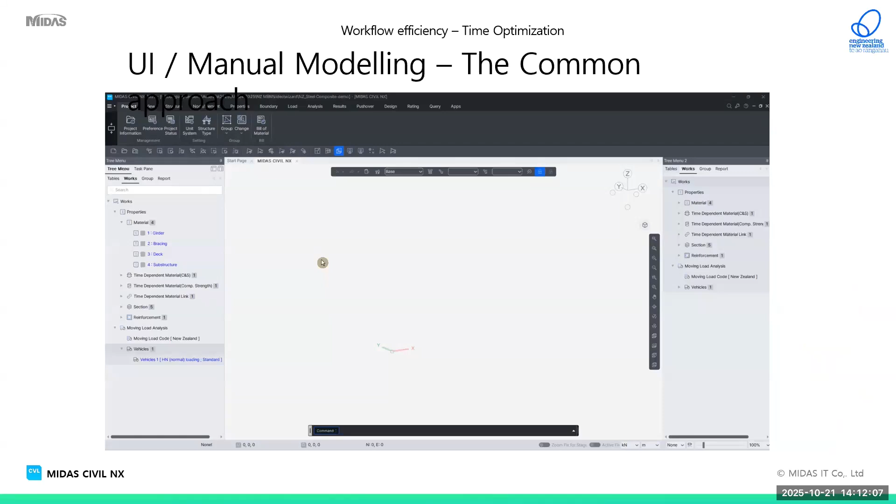Okay, so the very first one: UI modeling.

This is a typical way of modeling from the time when software were first introduced. This is just a UI modeling procedure within MIDAS. This might have been very useful back then, but with evolving technology, even this procedure had to change due to a couple of reasons.

Firstly is reliance on multiple sources for preliminary data. William has mentioned material sections, which to choose or which to prefer.

Second is time-intensive manual inputs if you need to modify anything, change anything, or even result extraction. For every revision, we need to extract results for every other scenario, and it is a very time-consuming process. It is also, with UI modeling, prone to user oversight.

It is difficult to reproduce the same results, and there's limited flexibility with iterations. Mainly, time is a very big constraint when we are going with traditional UI modeling.

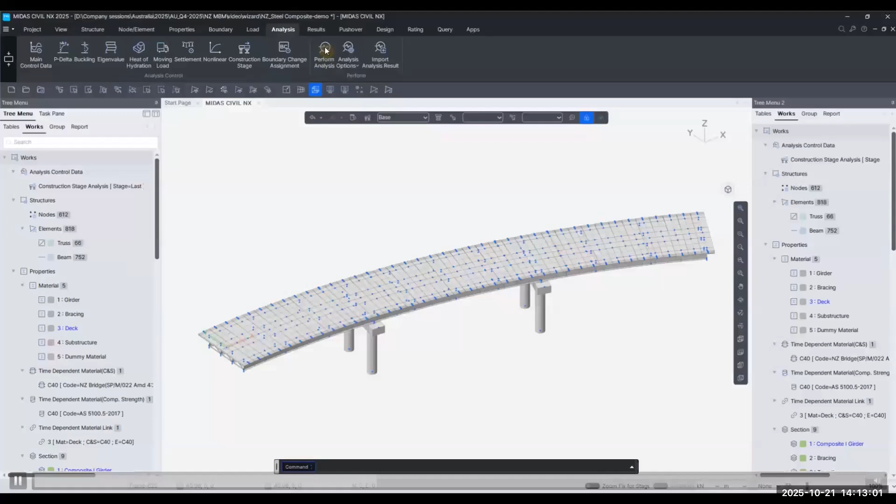So then what would be the way forward with this? We can think of Excel. Since every engineer is familiar with Excel the most, we can use Excel as a centralized platform and automate workflows through it, which will help us reduce the time which we are manually spending on the software part.

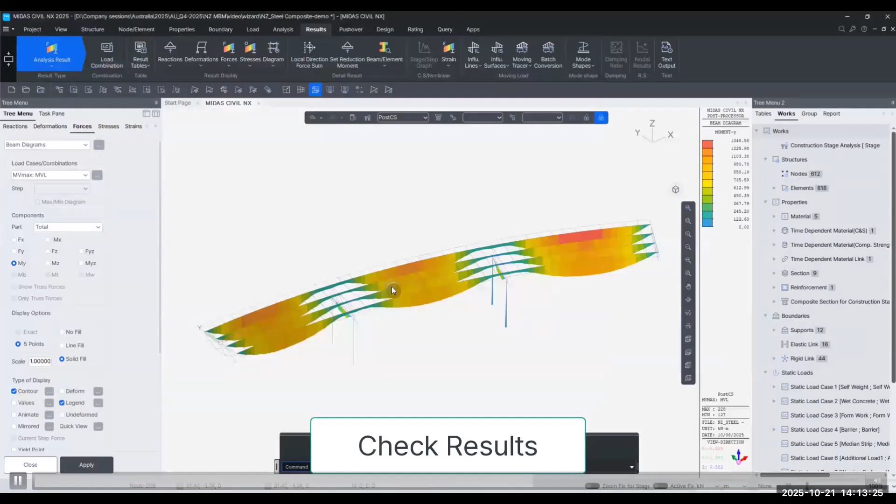This gave you an idea of how manual UI modeling can be conducted within MIDAS: definitions of material, defining the entire geometry, structures, and extracting the results. And if we intend to do the design within the software, we can conduct design as well.

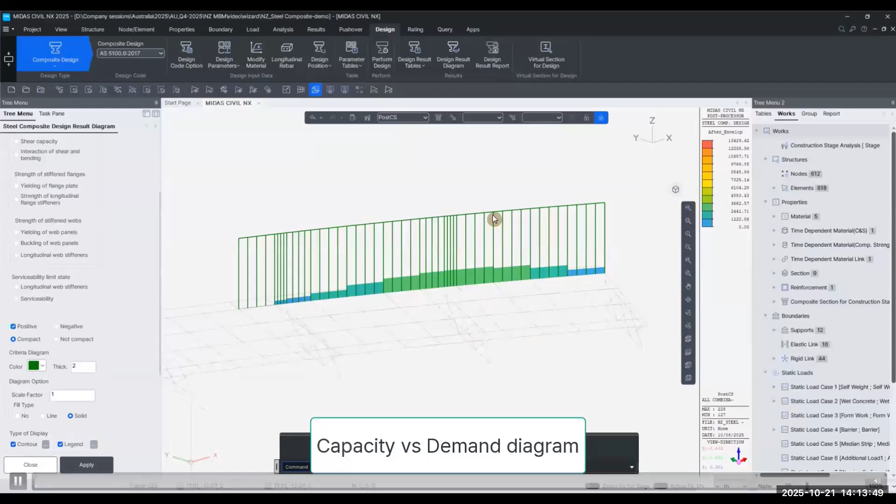This was an example of a steel composite bridge in curved span. Select elements for design, I'll just skim it through. Check the capacity of a few sections and obtain the detailed design report from the software, along with the design guide.

It is a completely automated spreadsheet wherein the entire geometry section, model, load, construction stages, everything is automated. Even result extraction is automated in the similar workflow.

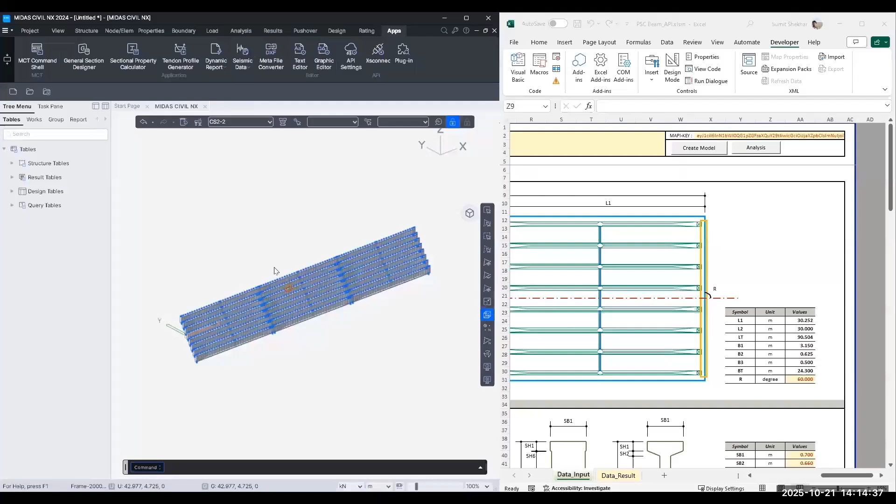With Excel, as long as the template is used for that intended purpose, maybe for the steel composite bridge with zero radius or no skew, it works like clockwork. We can use it n number of times. It is very efficient, very seamless.

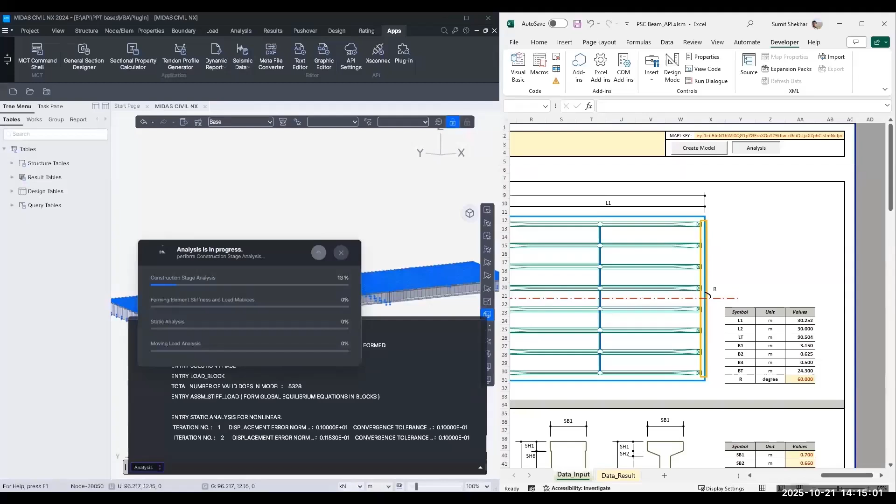But as soon as we try to make any changes to the existing workflow, most of our work is disrupted, because we need to change all the automation, check every step of how the material is created, how the geometry is changing, how the geometry is aligning with the loads which are input. So for fresh models, yes, this is a very good workflow, and engineers have been using it for a long time.

But now when there are revisions, again, if we need to add a skew or change the radius, I'm not saying it is not possible, but it is a bit difficult with Excel. Now engineers had to look for another option. So what would that option be?

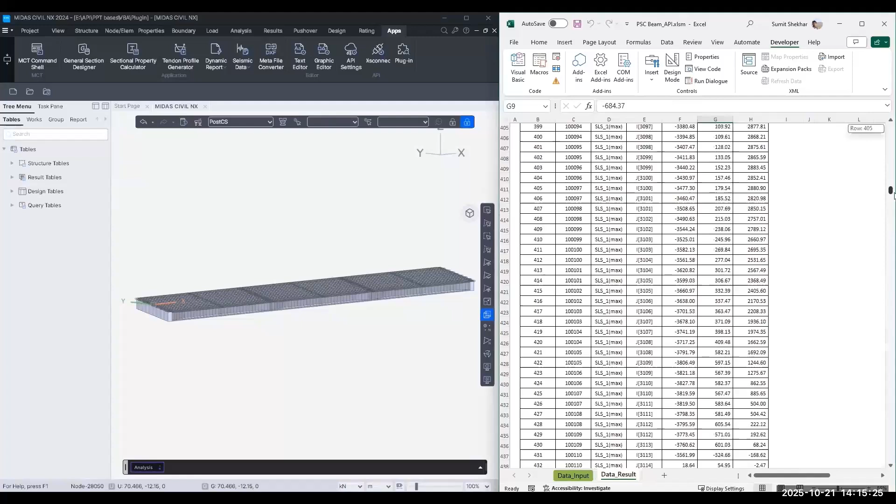It will be graphic and parametric tools such as Blender or Grasshopper. For this video, the entire bridge was modeled and the results were extracted in Excel itself, along with the images for report generation and documentation. Again, this works very well for a typical bridge, specific bridges.

Okay, now we have established that for fresh models, either you go with UI modeling or with Excel workflows, it will work very well. But what if we need to add parameters, as I said, change the skew, change the alignment? Then the parametric tools such as Grasshopper come into place. This is a simple example of how it can be parameterized.

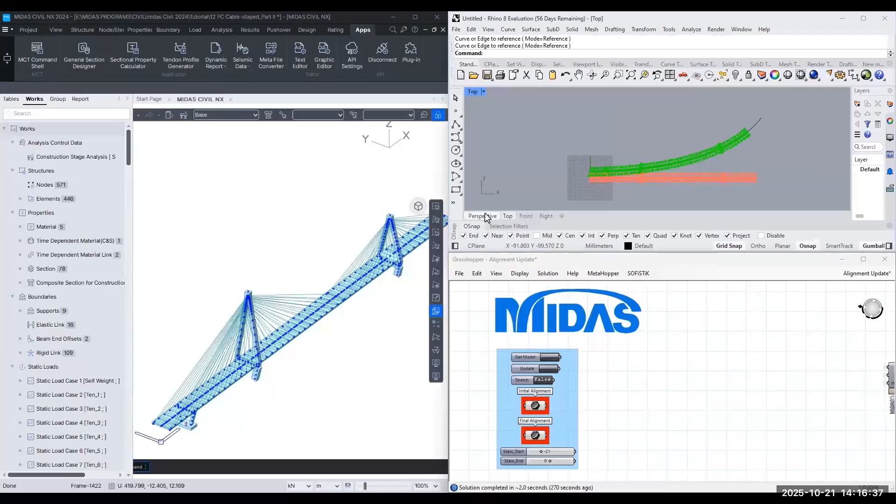So here we have already created the model with Excel or with UI modeling. Now we will add a parameter to change the alignment. Obviously it is very good if you parameterize the entire structure from Grasshopper itself, but we can also use Grasshopper to add parameters to a few necessary elements. So over here it's an example of changing the alignment. We imported the nodes in Rhino, defined an initial curve and a final curve so that the offset reference to move all the loads and the boundary conditions are present, and then we can update the geometry.

So I believe this is much more quicker and efficient with Grasshopper. Again, I'm not saying this is a better version, but I believe the engineer has to choose which tools he has to use for specific tasks.

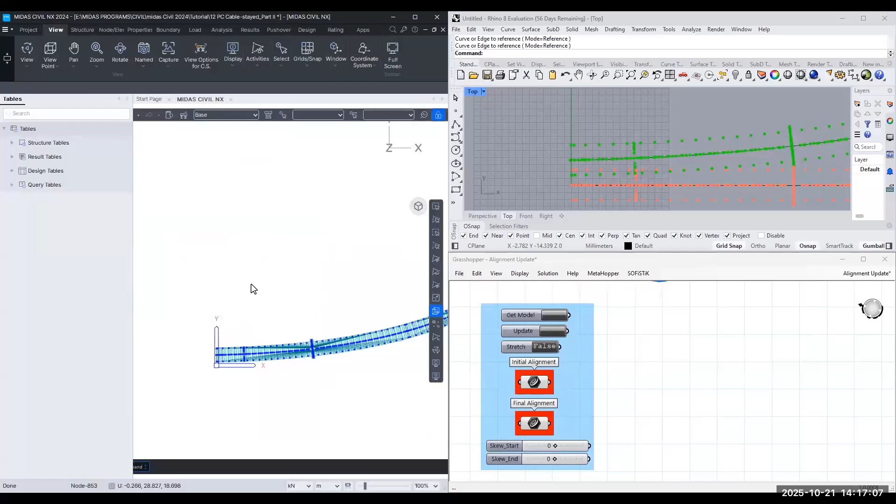Okay, now limitations with such tools. These tools are easy, but this does require an urge to go beyond just the structural engineering domain. And also with commercial tools such as Grasshopper, there is a cost associated with it, so again the accessibility is limited.

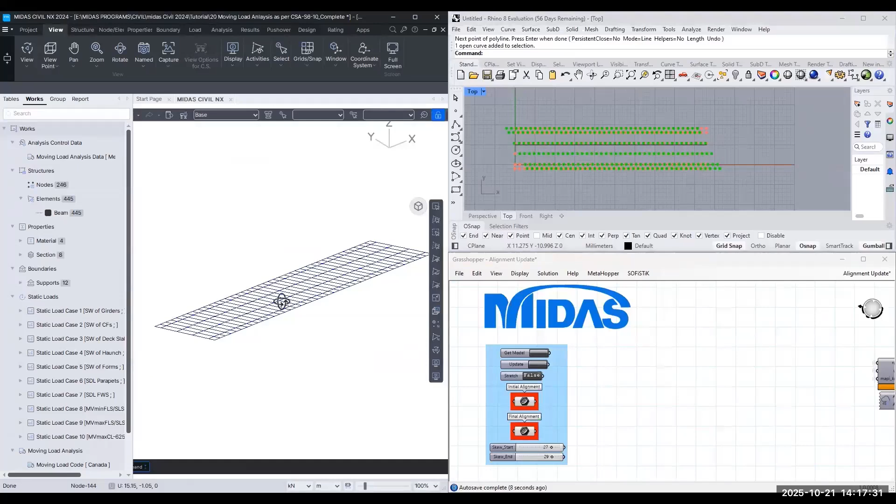Just on this, another example of aligning or modifying the skew for the specific structure. So we have seen just changing the alignment, and for the skew angle we have used Grasshopper. All the manual modeling was done by the core software.

So as I said, there is cost associated with it, therefore the accessibility for such tools is somewhat limited, I would say. What is the way forward with this? Then engineers tend to move to Python. We'll see why Python would be beneficial.

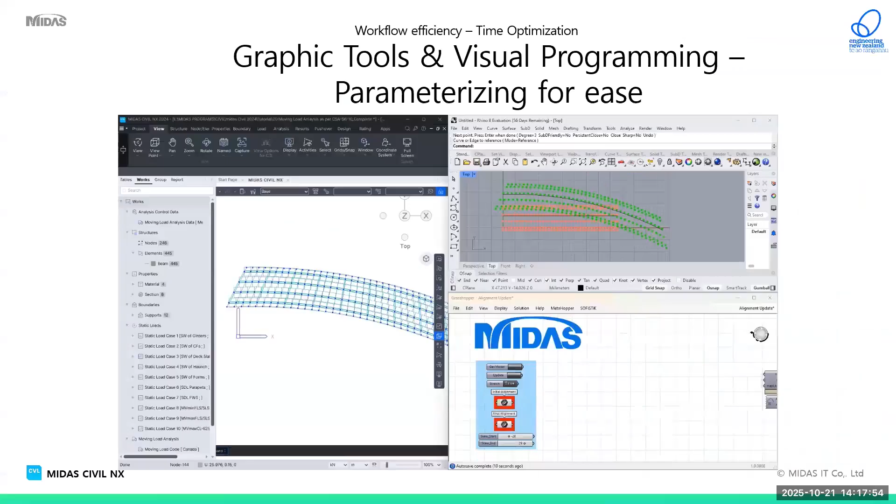Okay, so Python and why it is gaining traction. First is versatility, and its integration with modern tools and APIs. Also, I believe 90-95% of all the AI tools which are being developed are based on Python, so therefore Python is widely accepted, not only in structural engineering but even in other domains of engineering.

Let's talk about standard libraries in Python, which I believe will be the major asset for anyone using the libraries. Everyone must have heard about standard libraries of Python such as NumPy, Pandas, Matplotlib. These are typical libraries which are very famous. Similar to those, based on a similar concept to reduce the workflow, MIDAS has created its own Python library.

So it will reduce your entire script to easily readable syntax, I would say. This is just a list of all the components of the library. If an engineer requires, he can also take a look at all the backend coding of the library. It is free, or it is open source, I would say. And for engineers who just want to get the job done, they can directly use the library and make any specific changes.

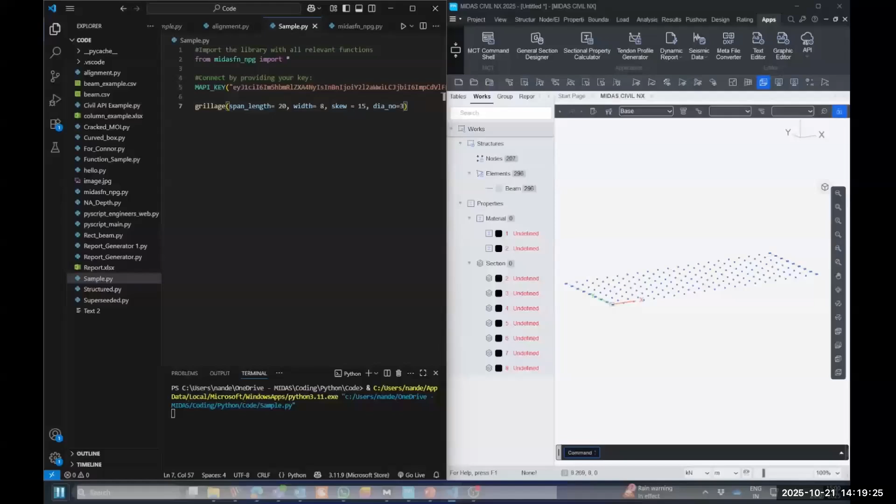So just on this part, we can see hardly 7 or 8 lines of code is written, and an entire bridge structure would be generated with this. So length is specified, width, skew, and number of diaphragms, and RCC T-girder is an example over here. So materials, sections, geometry, boundary conditions, loads, and even analysis is integrated with this single tool.

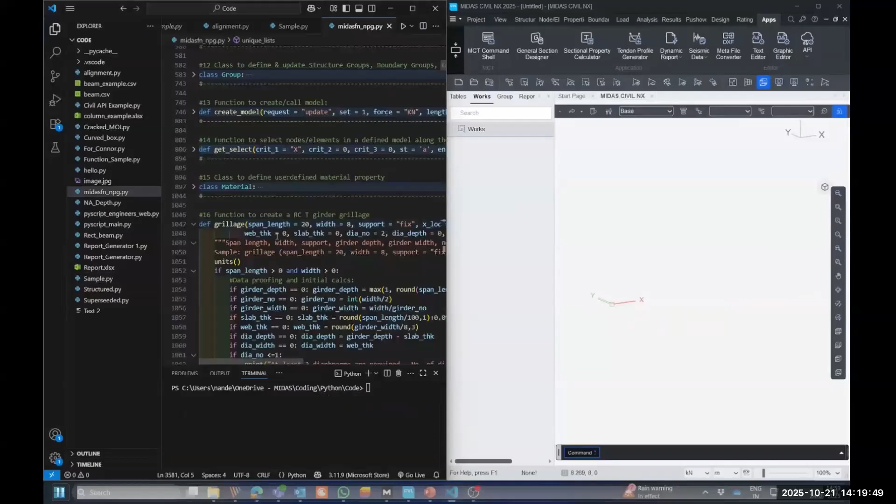So with just a single line, the engineer need not spend much time, just understand the code first and then generate the model quickly. And I also mentioned versatility.

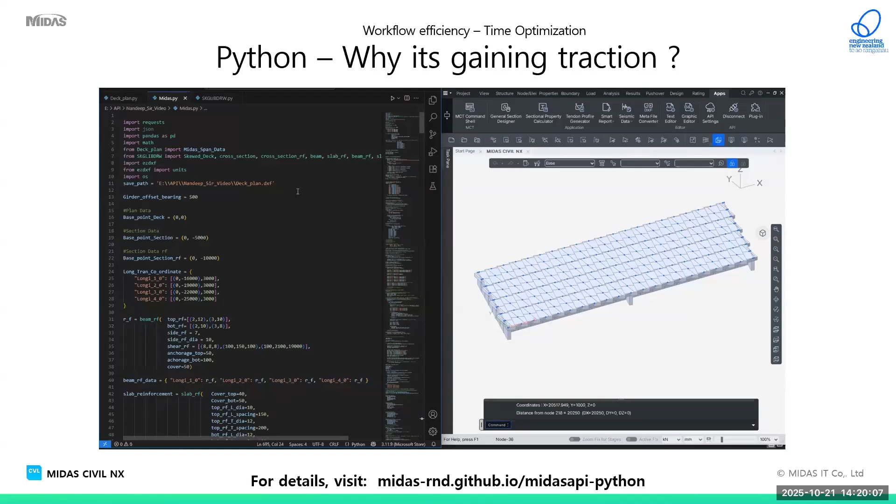So how can Python be used? It can be used to generate drawings. So instead of using any intermediate tool between the analysis software and the drawing part, we can directly generate drawings from the analysis tool itself, with the help of Python.

So for the same structure, the RCC T-girder structure which we generated in the previous video, we can create a DXF format. Again, this library is Python's own library. We have just used that library, integrated it with MIDAS API, and the drawings will be directly generated from the analysis tool such as MIDAS Civil NX.

So this, I believe, will help save a lot of time in the markup drawing stage, which every engineer draws and then sends to the draftsman, gets back, makes changes, and this goes to and fro. Instead, just a ready DXF file can be shared with the draftsman. All the plan view, element details, sectional details, everything can be extracted from an analysis tool.

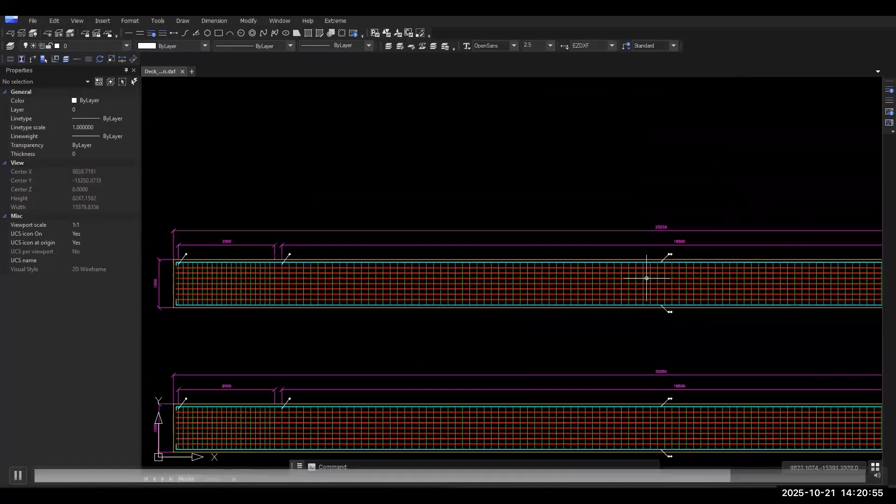Yeah, so we can see rebar annotations, reinforcement details. Yeah, complete thing.

I believe we have had clients who are using the AI or API until this point with Python. But then how should we prepare ourselves for the future? AI is something which is very big, and as William rightly said, I don't think anyone will be able to cope up with it.

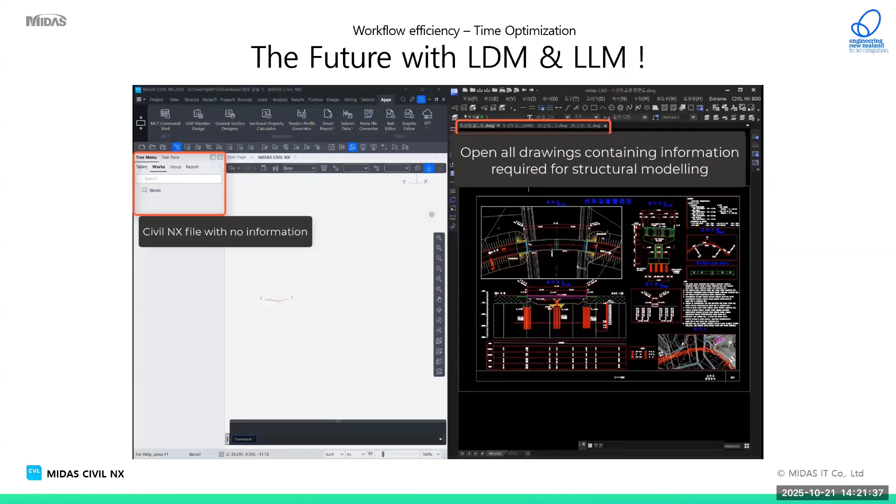But MIDAS is trying its best to implement AI in this drawing process, in its software products. So this is just an example of what we are working on. We are calling this LDM, meaning Large Drawing Model. Once this is ready, engineer can simply open the required drawings. Typical procedure is, if we have a past similar project, we open those drawings, take reference of those drawings.

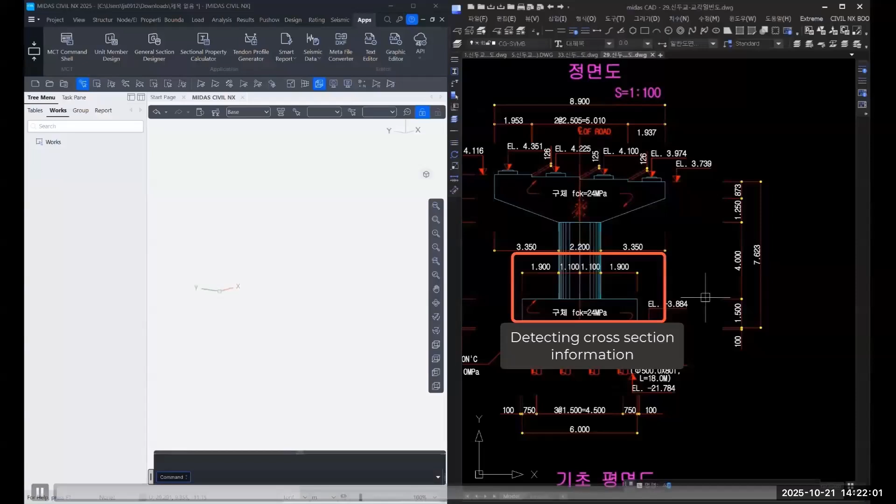Replicate it for a new project, modify, and then create drawings again for the existing project. So this tool will be able to identify all the sectional details, dimensions, material details, and it will be able to generate an entire analysis model within MIDAS Civil NX.

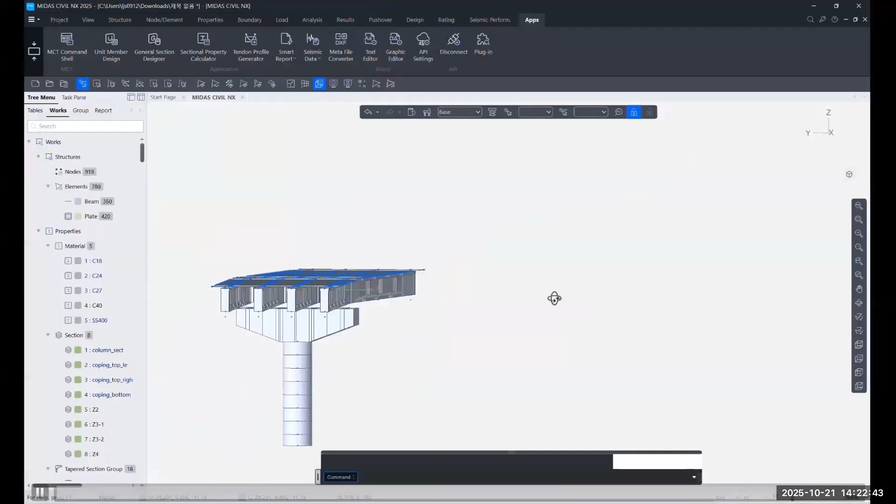So it will read all the components from the drawing format. All the information - general arrangement drawing, dimensions, material properties - will be extracted, and a complete model will be generated in Civil NX. Then you can do manual changes, add parameters, use Python, Grasshopper to modify as per the own project, and then automatically generate drawings again from the analysis tool. So engineer need not have multiple softwares. He can just use single model file for model generation, drawing generation, and all the things.

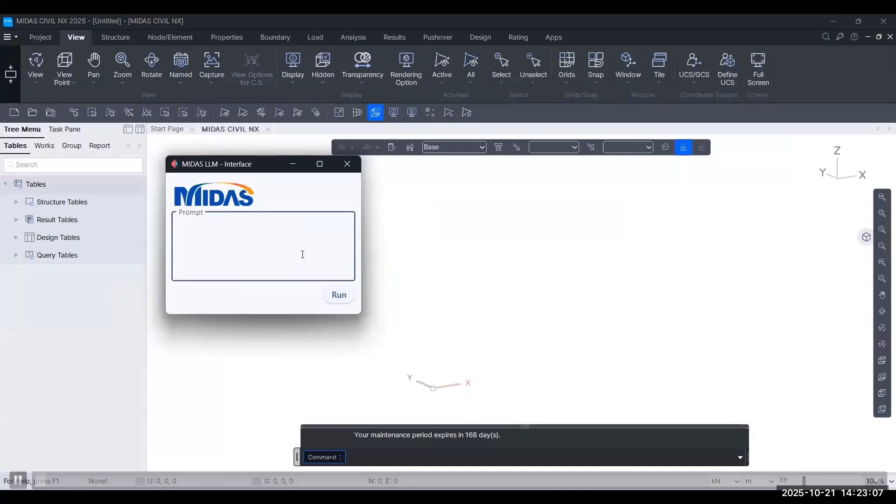And this is another aspect of how AI can be utilized. This is just something which we are trying with help of prompts. So let's see how this gives an idea. We can provide prompts. It is not developed yet, it is still in development. So yeah.

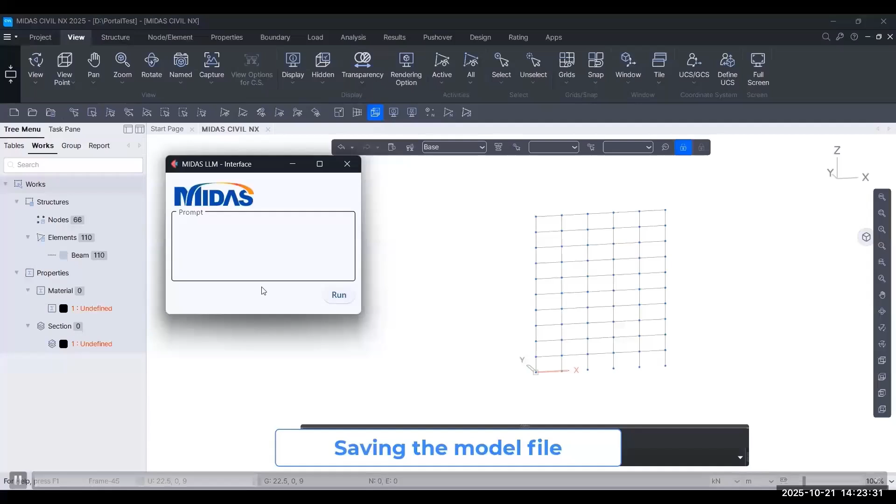So a prompt to create a frame structure - we just specify what bays, height, width should be provided. If you need to save, just write 'save the model', the folder location, and the model will be saved at the respective location. Just another example in this tool is to create a grillage.

Again, this was just the conceptual stage, so just limited training. But we can see how prompting can be one of the use cases, how AI can be implemented with the softwares. So create a grillage of so and so length, width, spacing, and a skew, and a grillage model would be generated.

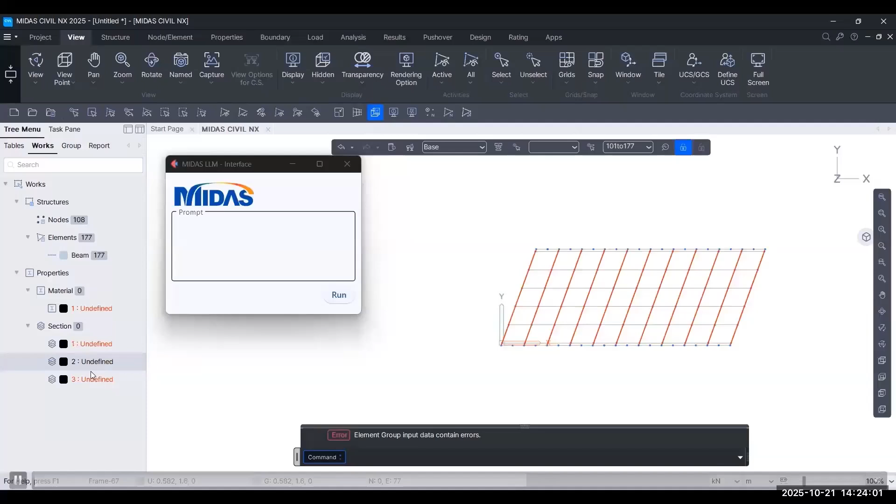And just to give you a bit more of an insight of how everything will work - I think it will be up ahead in the video.

So basically a Qwen 3 1.7B model was utilized as an AI to generate the scripts, and an LLM was used to train the AI on the MIDAS library. So this is how on the back end it will work.

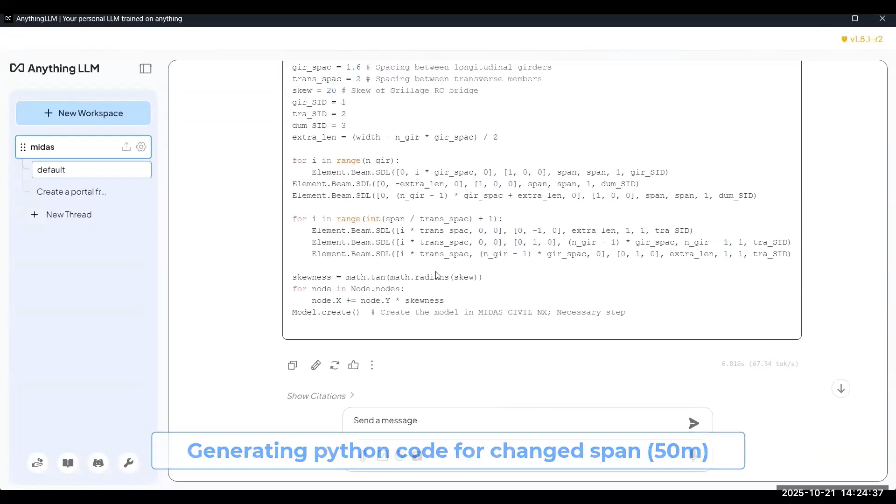So in the prompt, we're just switching the span lengths from 20 meters to 50 meters and click on generate. It will generate an entire Python code, and this Python code is backfed to the software with the help of API. So this is how the entire prompting function with AI and MIDAS CIVIL NX will work.

Improving efficiency is always, I believe, what everyone strives for. But as I mentioned, it should not be at the cost of compromising any codal compliances, accuracy, and local industry practice. So now let's take a look at how MIDAS helps us align all of these things together in the second part of the presentation.

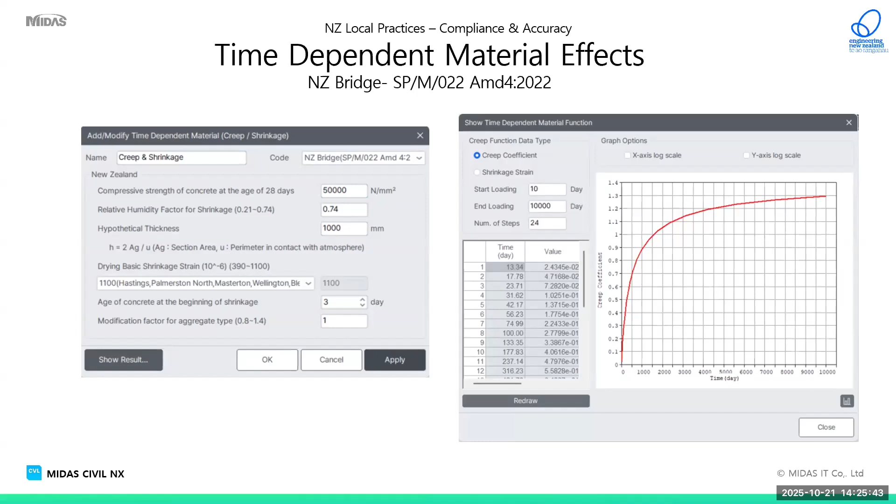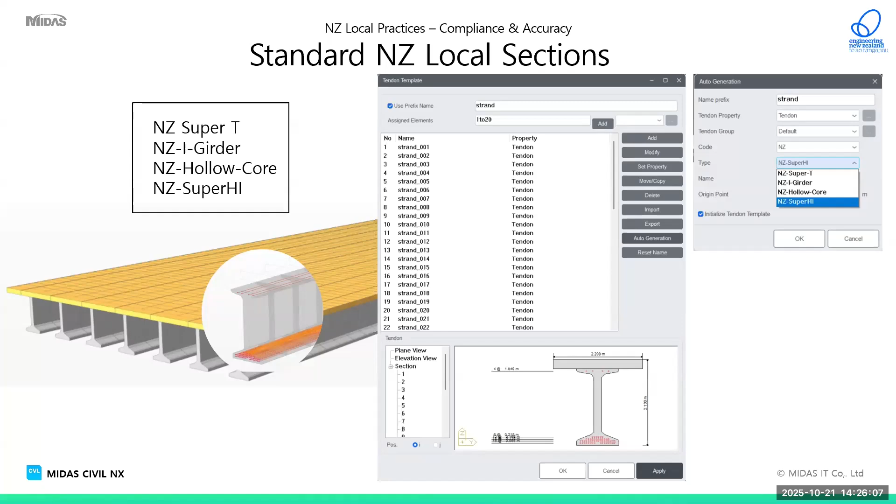Next up are the NZ standard local sections - these are mainly the precast sections which are widely used locally in New Zealand: Super T, I-Girder, Hollow Core, or Super HI. Super HI, I believe it's a new and upcoming section which will be widely used in the New Zealand region. And also tendon automatic generation for all of these sections is already present in the software.

Next up, non-linear boundary conditions. Especially in New Zealand, as opposed to Australia where linear conditions are used, non-linear functions are used to represent soil structure interaction. And yes, it is a very time-consuming task. We receive the properties of these nonlinear functions in an Excel sheet. Then we define the graphs first, and then we define the springs at different levels of the structure.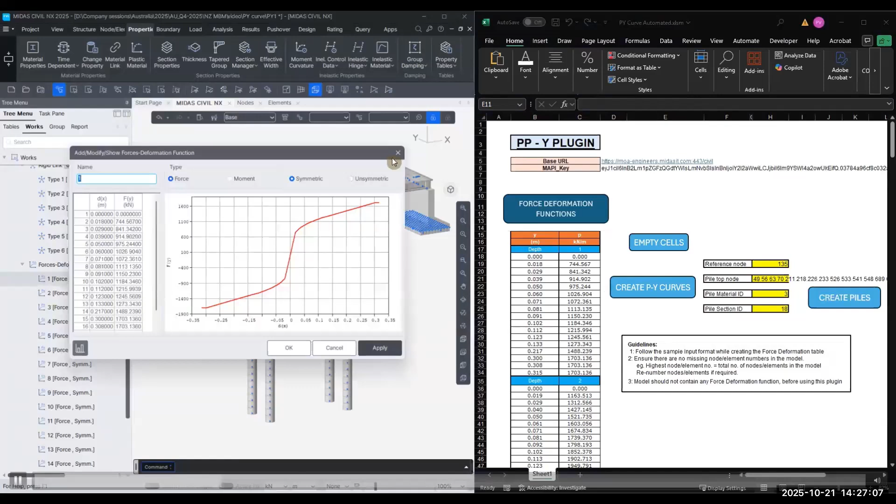So for such scenarios, an automation is already in place. Let us understand how this automation will work. The left hand side is a basic bridge structure, and on the right side is the Excel sheet where the force deformation functions are present. It will be a two-step process. First, to import all the graphs of nonlinear functions into the software. So we can see all the graphs are imported. I believe there are 25 graphs.

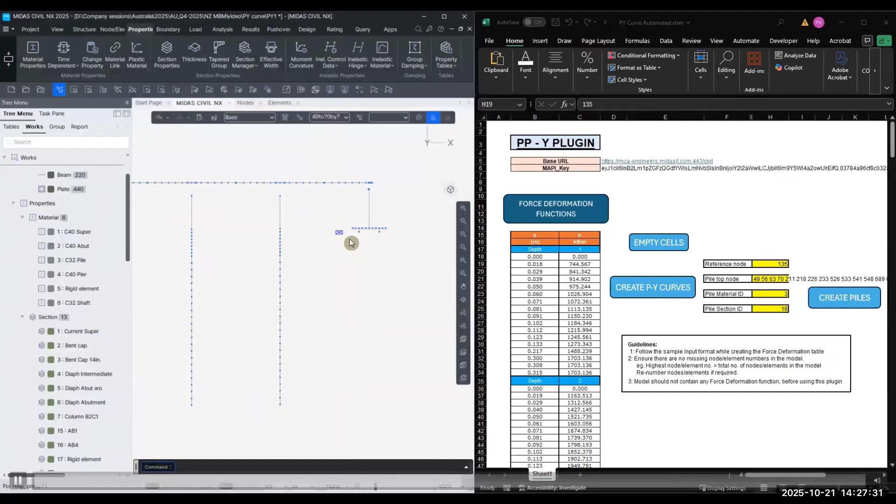Yes. Step one, and then step two is to assign the functions at respective depths through the soil and also generate the piles as well. A reference node is provided such that the specific locations of the springs can be determined. Top nodes from which the piles will be created are selected. So we enter the same information in Excel. And then section ID and material ID, so which sections and which materials are to be assigned to the piles which will be created.

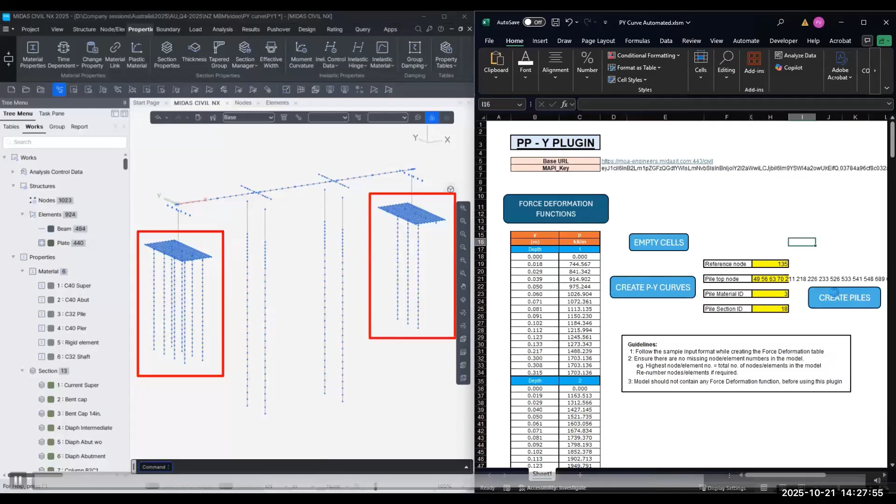And once this is all set, we can simply click on create piles. One by one, all the piles will be created, and specific force deformation functions will be assigned at respective depths. So for all the revisions you have, you can simply use this function. N number of revisions, multiple springs, even if they are obtained n number of times, we can keep using this functionality as is.

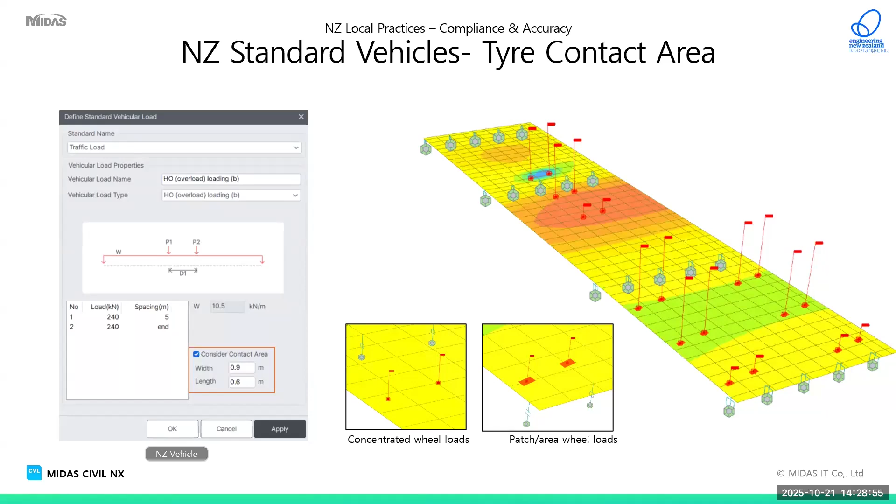Next up, standard NZ vehicles. All the vehicles such as HN-HO, general access, 50MAX, fatigue vehicle, deck evaluation. These are all the vehicles available in the NZ Bridge Manual, and they are all standardized options within the software. To go more specific, every vehicle has a particular tire area. Usually in plate elements for a bridge deck, if we consider an area load rather than a point load, we obtain a better force distribution. So that also can be considered within the software. We can obtain a moving area load instead of a moving point load for plate elements within the tool.

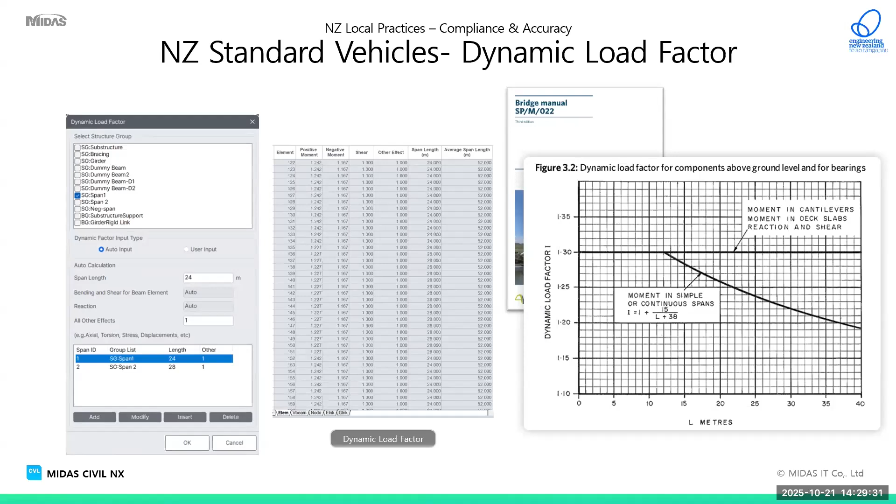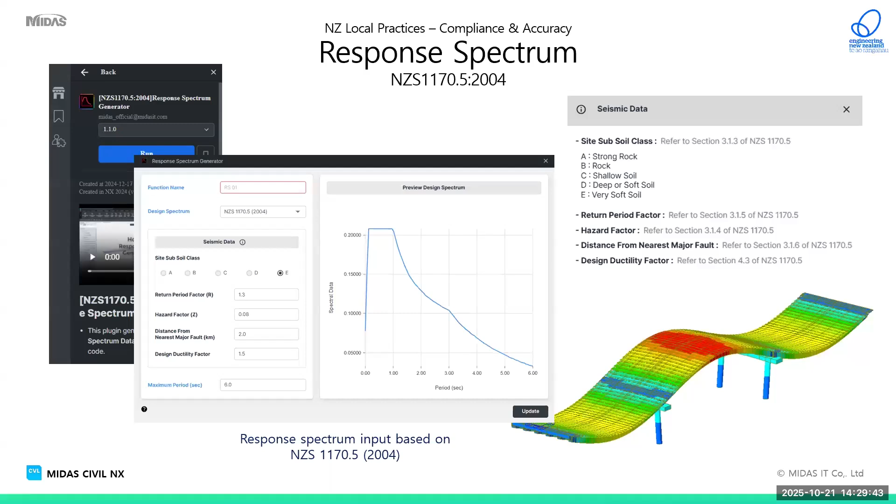Next up is response spectrum. Yes, this is again a direct option. Select the soil, probability factor, other parameters, generate the response spectrum curve and use it in the analysis. But the main challenge is combining the response spectrum and the soil nonlinear function. Response spectrum being a linear analysis, it cannot be utilized directly with the nonlinear property which we have defined in the soil. So for such scenarios, we have developed a tool which we named iterative response spectrum.

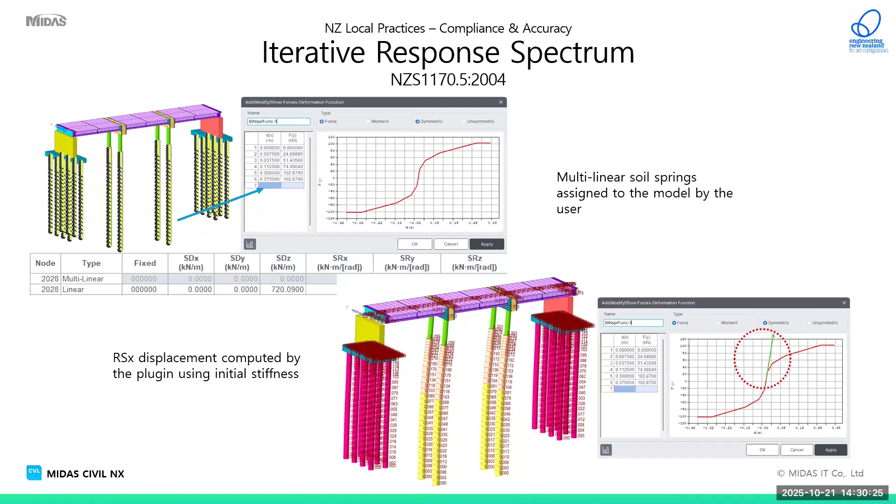So let us understand how this works. It follows a similar procedure which we have discussed with the clients in New Zealand. They used to do this manually, but now a tool has been developed for such purpose. Whenever a nonlinear function is assigned for the bridge and we conduct a response spectrum analysis, all the nonlinearity is converted to linear springs, considering the initial stiffness. Once it is analyzed, a displacement is obtained at each and every spring location, and we assume a particular tolerance. If the displacement is outside our assumed tolerance, then a secant is drawn from 0 until that displacement in the nonlinear function. Now a reduced stiffness is obtained.

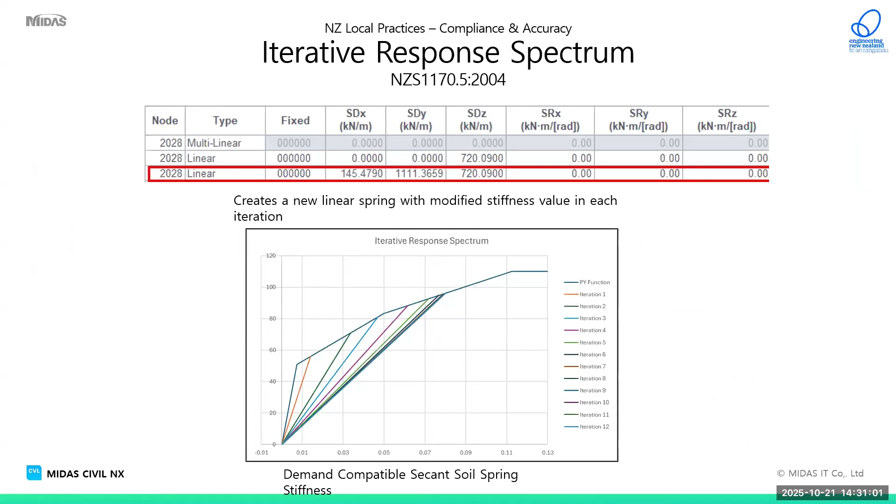And again, response spectrum analysis is conducted. This has to be done repeatedly so many times that all the nonlinear springs in the model converge within the tolerance limits. So we understand that this must be a very time-consuming process. So again, a tool has been created for such scenarios. We can see the same structure which we have been seeing in this presentation. There are nonlinear functions. This has been developed with Python.

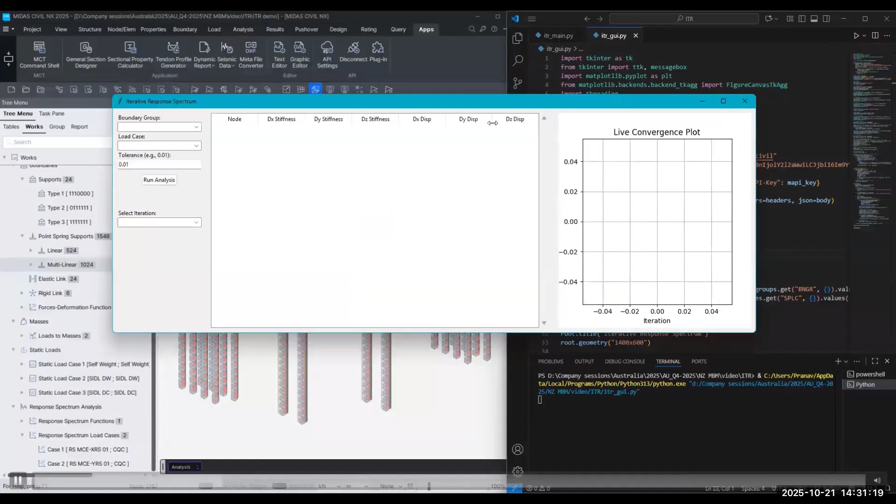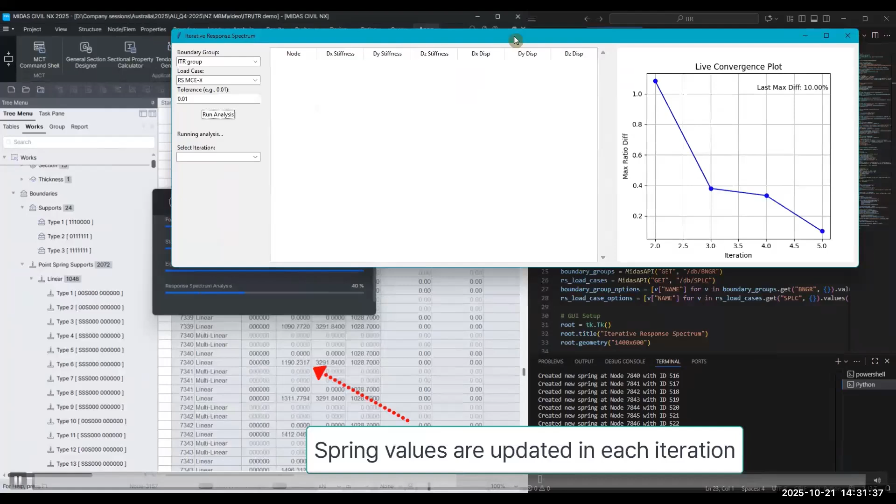When we execute the ITR, iterative response spectrum script, it uses a boundary change assignment feature, because that stiffness has to be used just for the response spectrum and not for the static cases. Tolerance is assumed. Obviously a playback speed is applied to this. But we can see a live convergence graph as well, and the spring values which are updated at every iteration. In each iteration, the software compares all the spring locations with the tolerance limit, updating if outside the tolerance limit and putting it back into the software. Around 12 iterations were conducted, and then the software finally converged. I believe manually it would take at least a week for such updates and iterations.

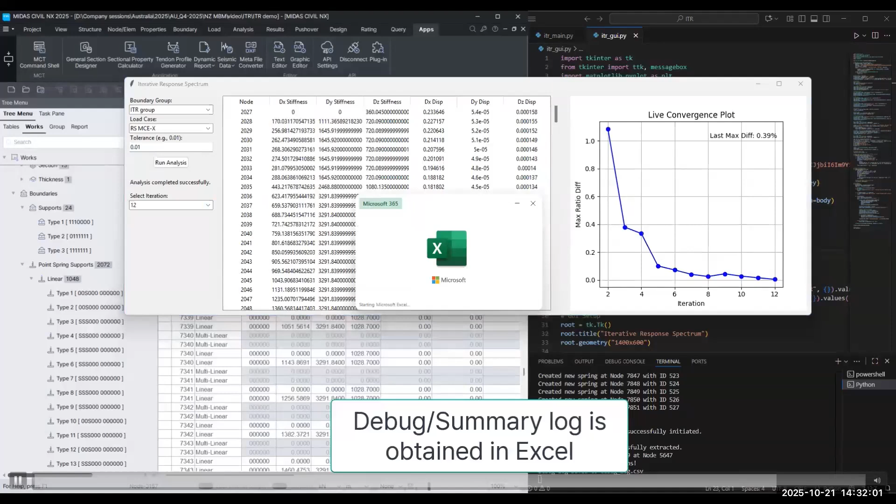And also a debug log in Excel format of what are the steps, what are the maximum tolerance at each step is observed.

Okay. Another typical analysis which has been observed in Australia and New Zealand. In Australia, again, it is a linear analysis, but in New Zealand, it is non-linear springs. So it is called soil sensitivity analysis, wherein we already have the soil nonlinear functions. Let's say they are of 100% stiffness.

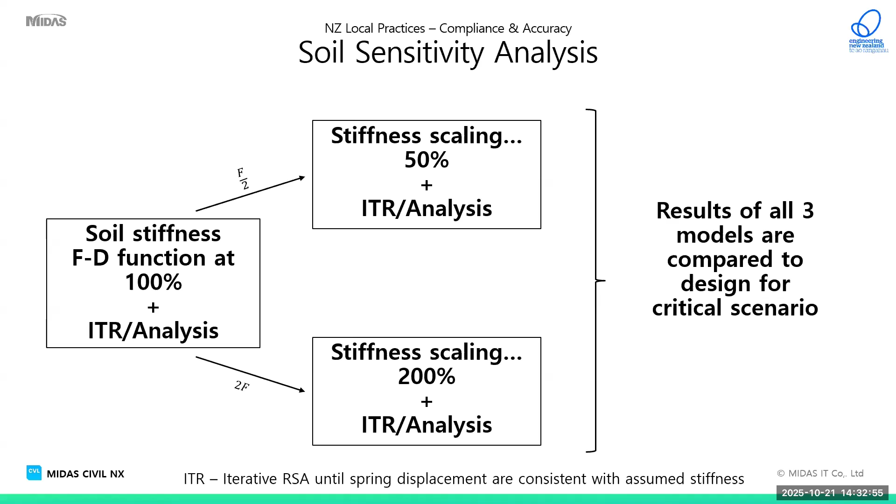Then a different model or different case is created where the stiffness, so in the force deformation, the F is reduced to 50%, divided by 2, and a third scenario where the F in the force deformation function is multiplied by 2. It is increased to 200%. And a sensitivity analysis between all three models is conducted, the results are compared, and it is designed for more critical values. So again, this has been automated within the tool.

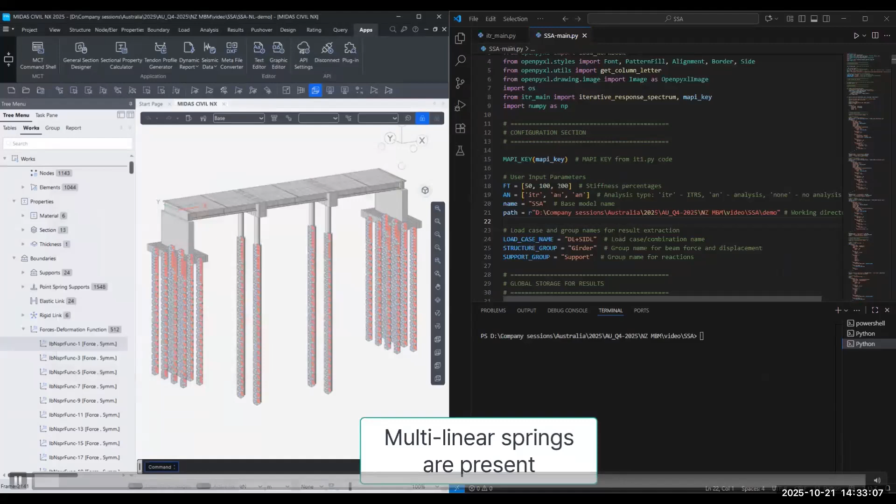Let us understand how this works. Again, same structure where multilinear springs are present. Let's look at the inputs first. So scaling percentages, we want to scale it to 50, 100, 200. ITR specifies it should go through iterative response spectrum analysis, AN just regular analysis. Name of the model and the location where the model is saved. And for result extraction, the load case, structure group, and the support groups whose results need to be extracted.

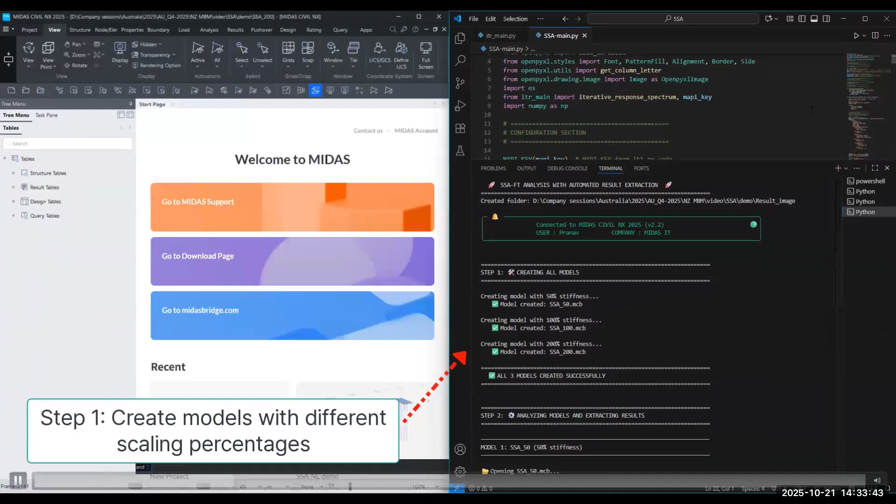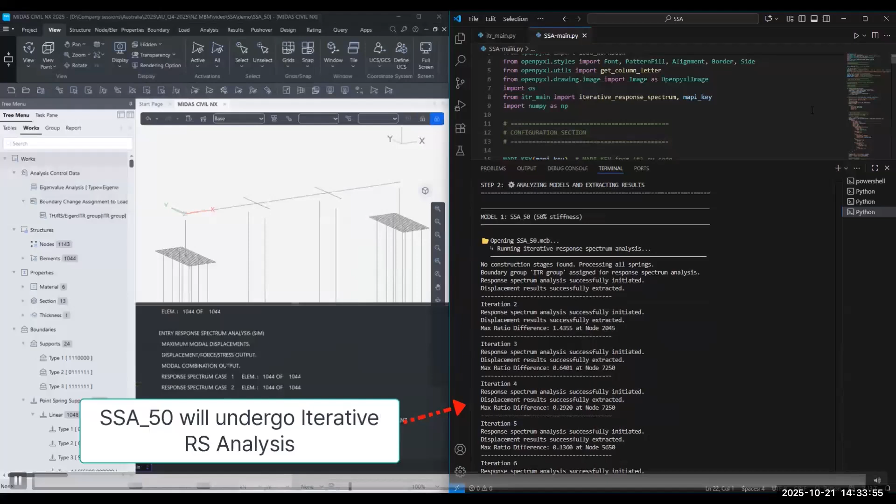So when we execute the SSA script, the first step is to create the different cases where the spring stiffness is scaled to 50%, 100%, and 200%. So step 1, create models with different scaling percentages. So it will create, and the first one, the 50% scaling, was set to ITR analysis. So the iterative analysis which you have seen in the previous slides is being conducted over here.

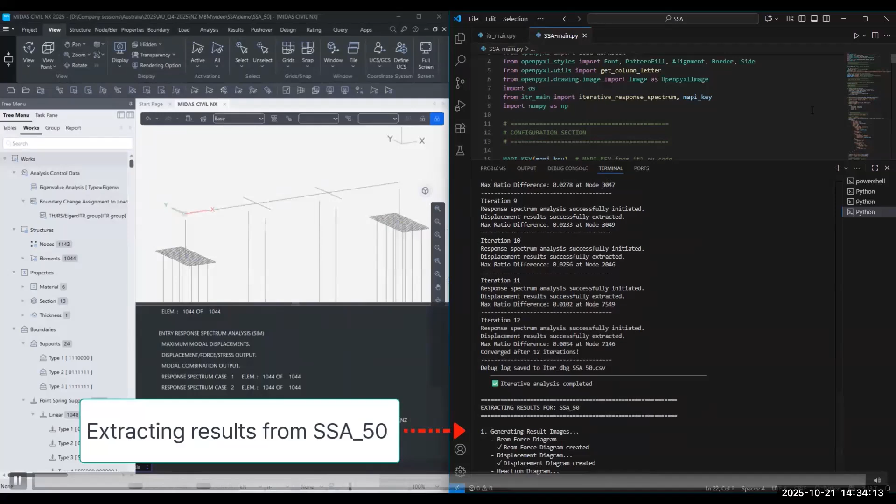So it will also give you a detailed overview of the displacement tolerance in the terminal view of Visual Studio. After the analysis is complete, as it's converged, it will automatically extract the results and save them in an Excel sheet in the background. Then next up, it will open the second model. So all of this will be conducted with a single click. Second model, SSA_100. It will be analyzed, and its results will also be extracted into an Excel spreadsheet.

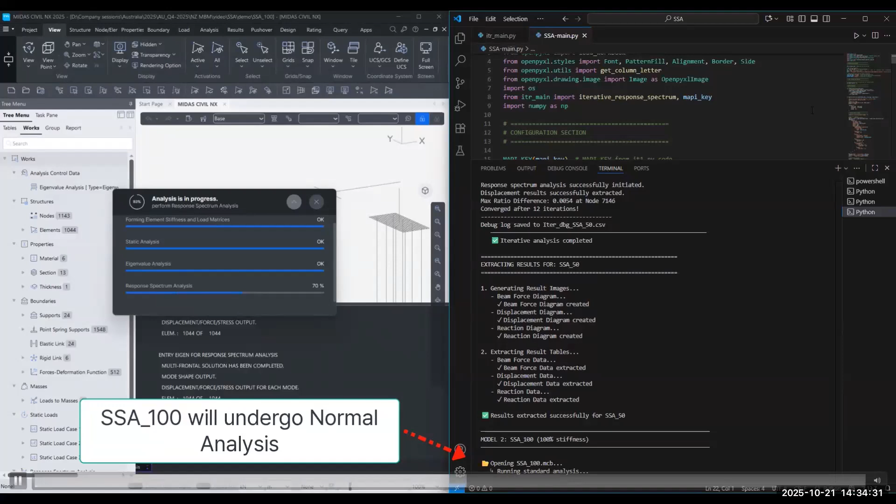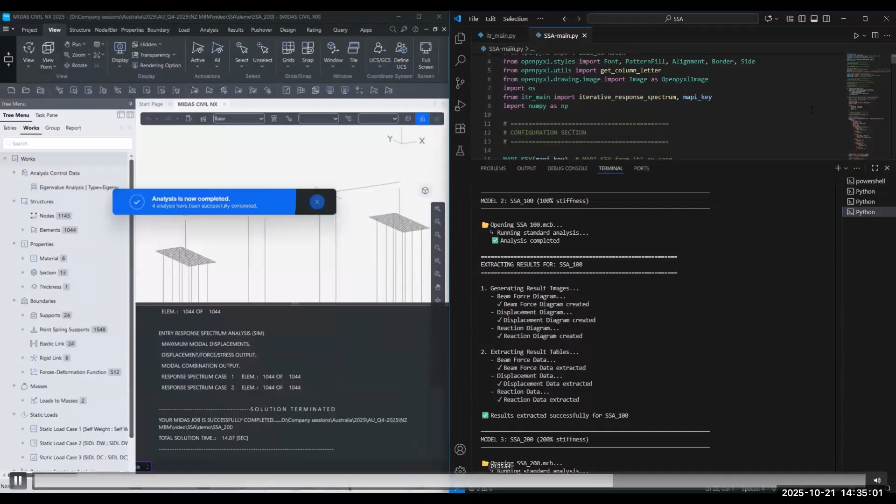You can see the UI of the software changing because it is actively extracting the results from the software into the spreadsheet. Yeah. And finally, the last model, which is SSA 200, it will automatically open that model and analyze it. So there can be multiple models. These are just three, but if you want to test the sensitivity for different scaling percentages, 75, 125, you can add multiple models, and all of these models will be analyzed, scaled, and results will be extracted with a single click.

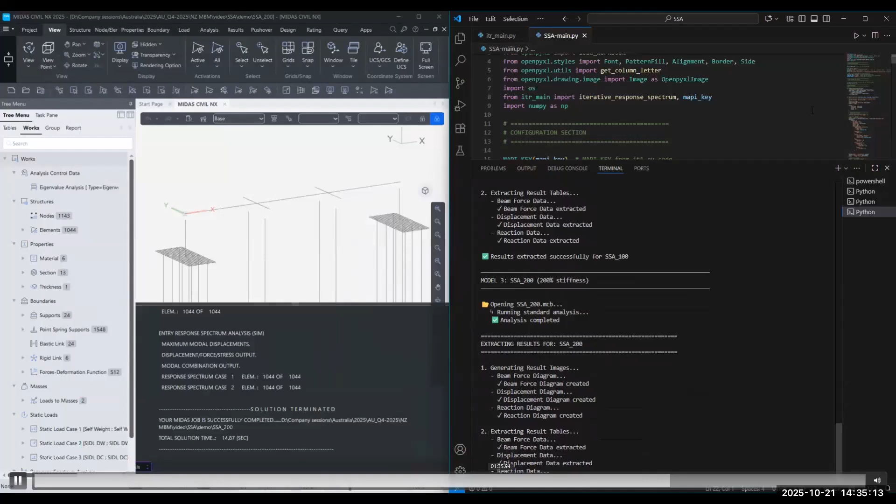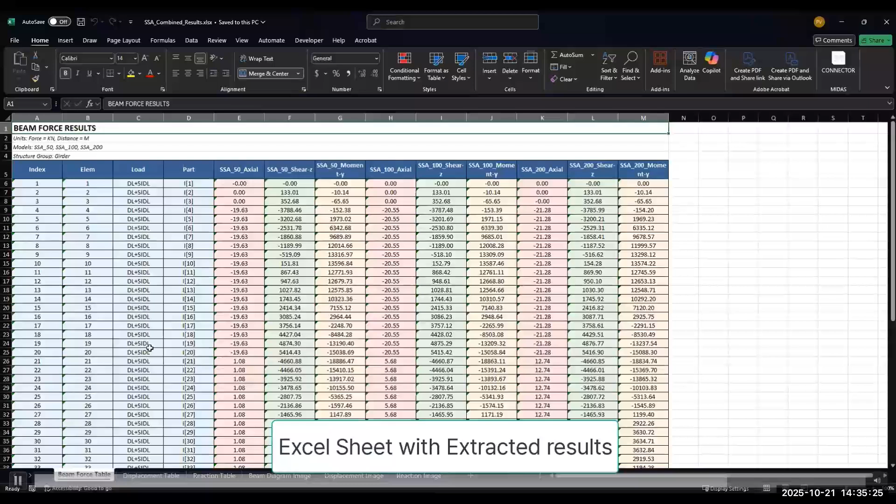All right. Script summary of the extraction procedures. If there is an error, it will also report the error and ask you to change it. And finally, we'll look at the Excel sheet, where the script has been compiling all the results. So all three results, 50%, 100%, and 200% scaling, are compiled in one Excel sheet. These are the beam force results, then the displacement tables for all three models. So we can compare, and in a single view, have a glance at the results of different models. Result images are also extracted into Excel spreadsheets. All right. So this was about soil sensitivity analysis.

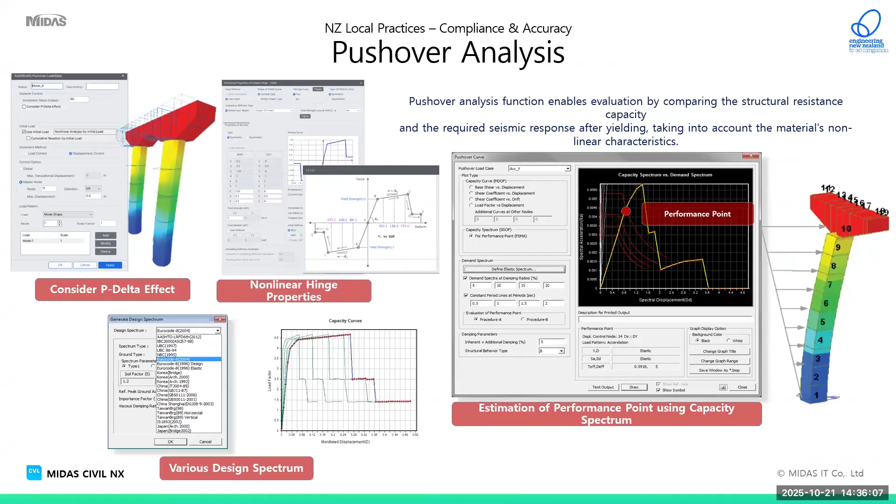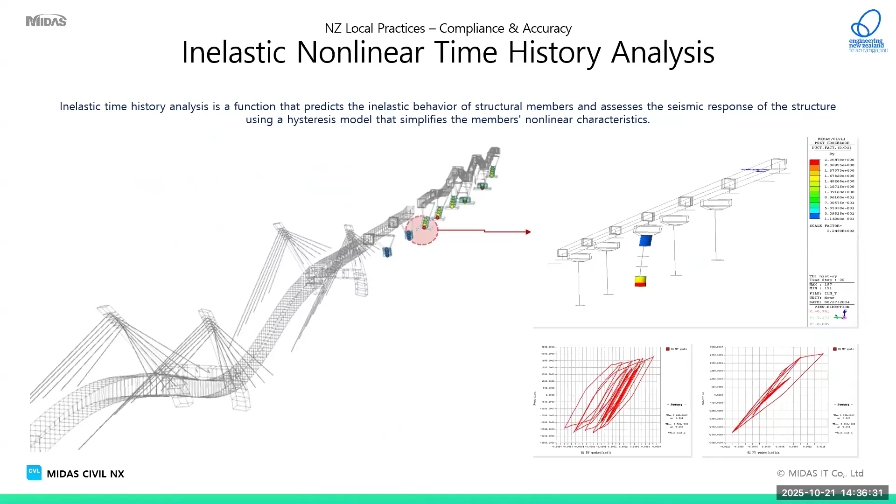And next one, just very briefly, pushover analysis. There is also going to be a demonstration of pushover with building structures, so we'll understand more about pushover in the next slides. Then just to show that dynamic nonlinear is also a functionality within the tool. If you want to specify a base isolator or shock transmission units for your structures, that can also be conducted within the tool. And inelastic time history analysis, I believe the most advanced seismic analysis, is also possible within the tool, also with fiber hinging. So we can use either fiber hinging or moment curvature or rotation kind of hinge properties for the model.

And yes, to sum up my entire presentation, I believe traditional methods will always be there, but as engineers, we want our tools to build designs faster, safer, more economical, and optimized. So automation is something which was considered fancy in the past, but with all the resources available lately, all of them being just a click away, we believe it is easily achievable. And for all this, we at MIDAS are always there to help you at every stage.

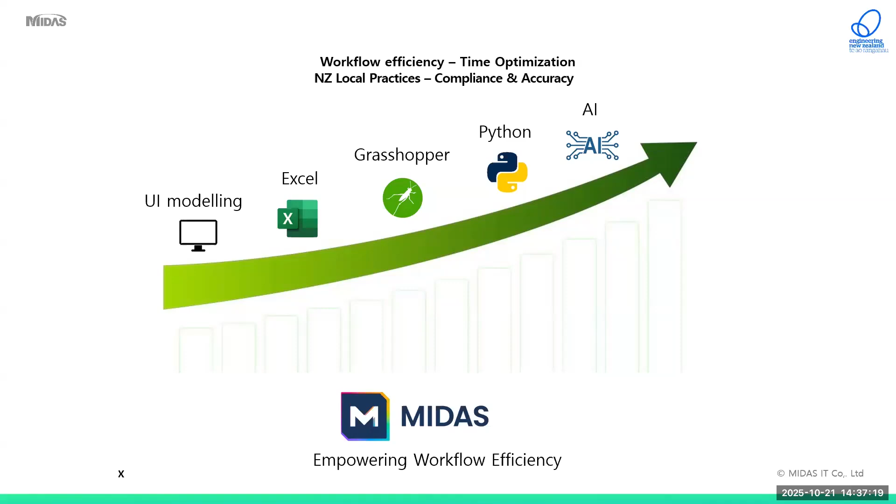So not just yet, I might continue with my next one. Yeah. So this is a short bit, maybe about 10 minutes, on simplifying seismic analysis for buildings with MIDAS Gen.

So this is just to give an idea, because I believe MIDAS is very well known in the bridge industry space, but I just wanted to highlight the building side of MIDAS, which is using MIDAS Gen, and pushover analysis or seismic, which is very required in most of the projects in New Zealand, just to demonstrate the capability of the pushover side in MIDAS Gen.

If the performance is satisfied, all good. Otherwise, we need to resize all the sections, redesign, and repeat the entire process again. So not the entire process in the demonstration part, just the last step of pushover analysis with the building structures. I've considered an example. I believe it will be a 5-7 minute video. I'll explain through the video.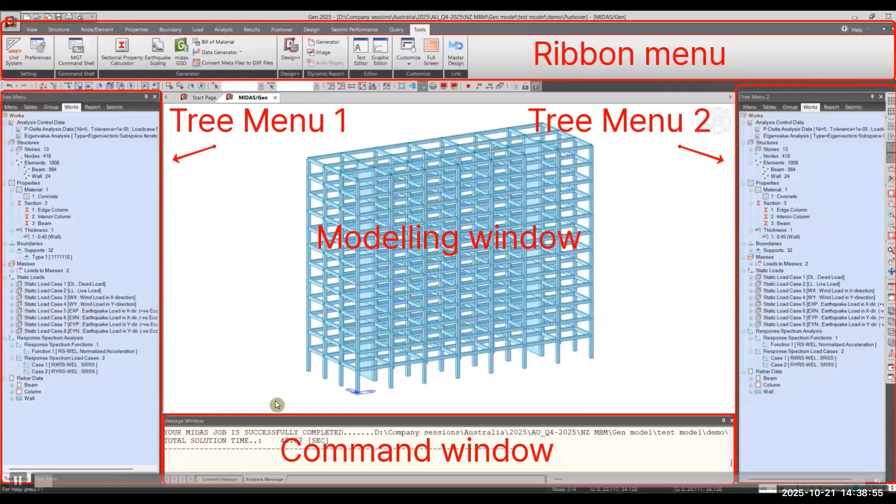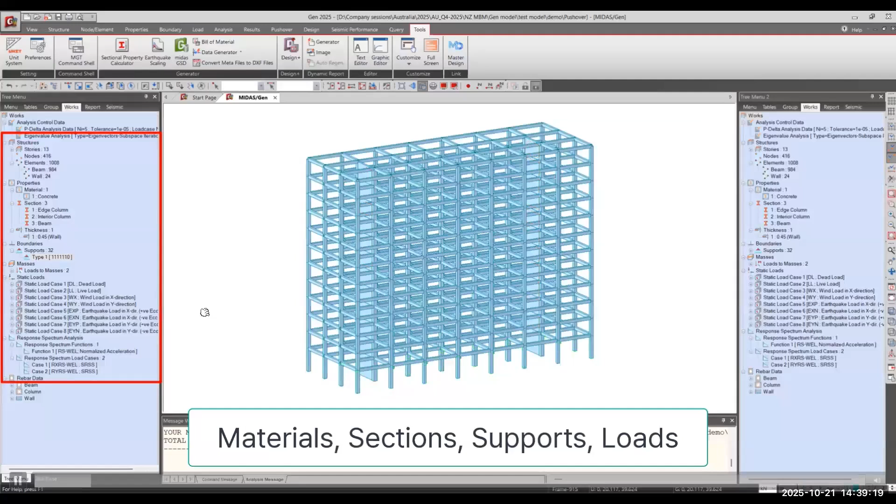For those who are familiar with Civil, this is the same interface as Civil, but all the functions are building specific. The UI, tree menus, unit systems are all similar, so there should not be much time needed to get hands-on with the tool. Just to give basic information about the model, materials, sections, loads are defined. There is also a shear wall considered, modeled with the automatic meshing feature within the tool, and some basic loads, earthquake loads, wind loads, and response spectrum as per one of the scenarios of the NZ code.

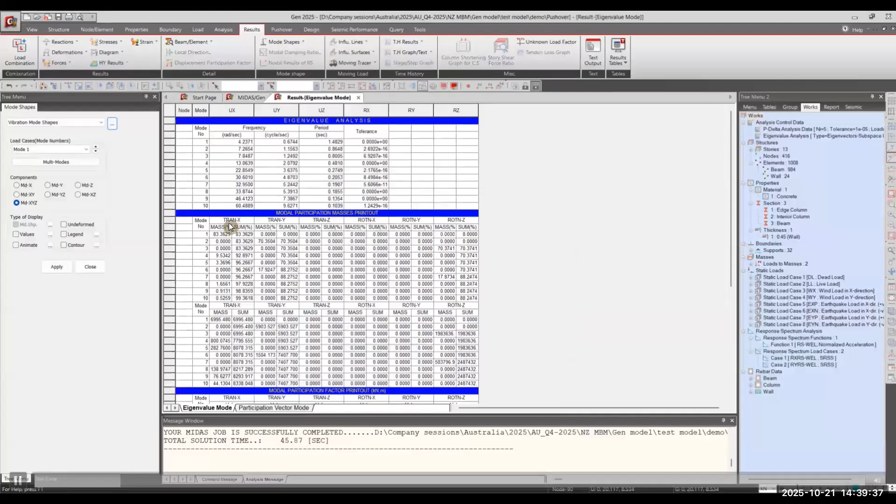So it is already analyzed, and we'll first look at the mode shapes, because in pushover, it usually depends on what kind of pushover load we are going to apply, whether it be a nodal body force, inertia force, or just a specific fundamental mode in X, Y, or Z direction. So with the modal shapes, we have already determined the fundamental mode for X and Y direction. Then we'll start defining the pushover controls one by one, first with the global control.

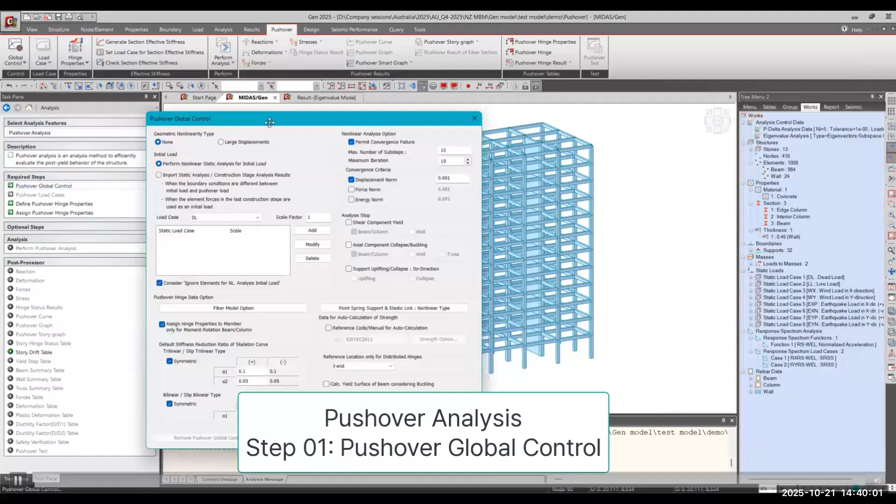There would always be some permanent loads, so the permanent loads should be added first in the initial load. After the deformation of the permanent loads, the pushover analysis should be conducted in the deformed state of the permanent loads. Then set up some necessary options in the global control. So step 1 done. Step 2 is to define the pushover cases.

So we defined 2 pushover cases, push in X, I believe LCX and LCY. Set up the iterations, P-delta. Either we go for P-delta or large displacement, which is geometric nonlinearity. Load control or displacement control method. I guess those familiar with Civil already know this. Most of the steps are similar, but this is mainly for the engineers who are working in the building sector.

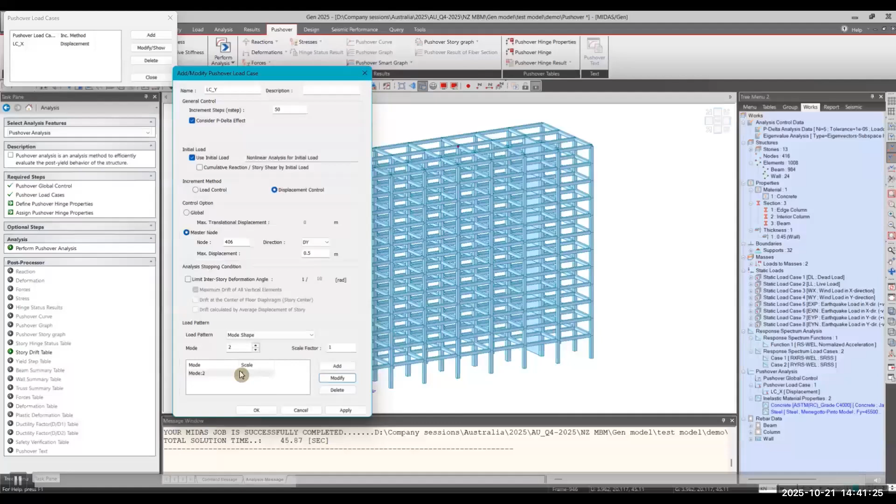And then for the control node, we specify a particular node at the top of the structure, specify the maximum displacement at which the pushover should be restricted, and different load cases or options to apply the push load. So here we are considering mode shape. Mode shape 1 was very dominant in X direction, and for Y direction, we also set up a similar push case, I believe mode shape 2. So this completes the second step, defining the loads for pushover. The next one would be to define the hinges.

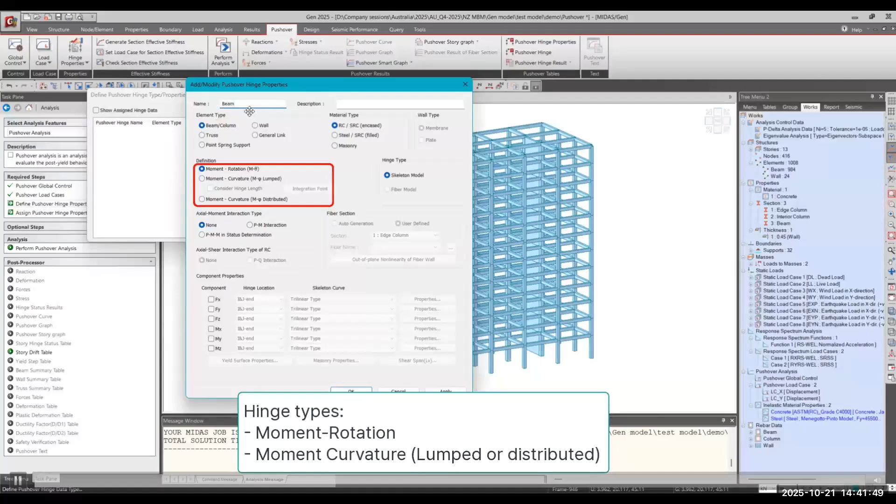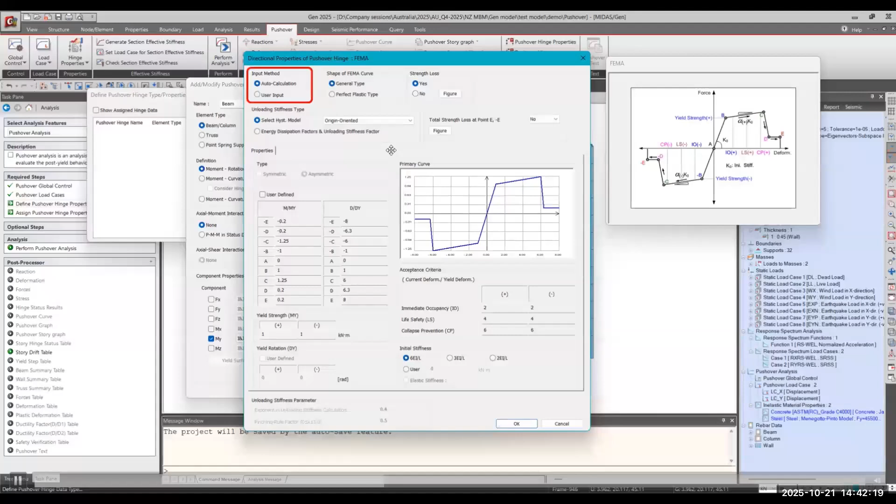In hinges, there are different types which engineers use, be it moment rotation, moment curvature, either lumped or distributed, and also fiber type hinges. Then we have different interaction types, PM, PMM, or none. When defining the pushover hinge for beam elements, usually MY, and different skeleton curves, bilinear, trilinear, or as per FEMA and Eurocode 8 standards are automated within the tool. And if we have a specific skeleton curve, there is also an option to user-define it within the options.

This is for beam elements. Then for column elements, usually the PMM interaction type, because it's very dominant. So we go for the PMM interaction type for a column hinge.

So we'll just define that. So Fx, My, Mz, all of these degrees of freedom are considered capable of hinging. And finally, wall elements. So the wall, which is modeled as a plate element, we'll define with a fiber model setup, just to explore the possibility that yes, fiber modeling is possible. And in this, we can see how convenient and easy it is to specify a fiber model to

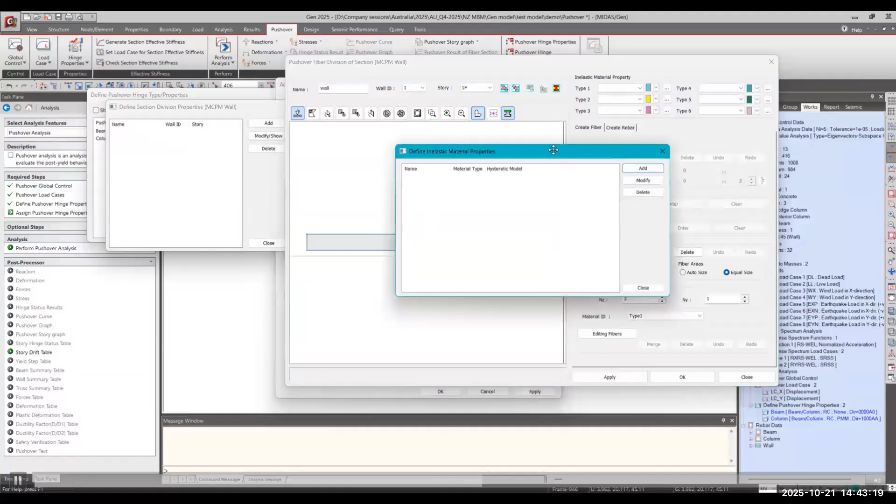the building element. So import the existing wall element, then we mesh the wall element with equal sizes, or we first define the materials. So different material models are directly available. For the concrete material model, I believe Japanese code and Mander model are available, or there are a couple of models over there. We'll just select the Japanese one for this one and specify the materials. For concrete, similar materials will be defined for steel.

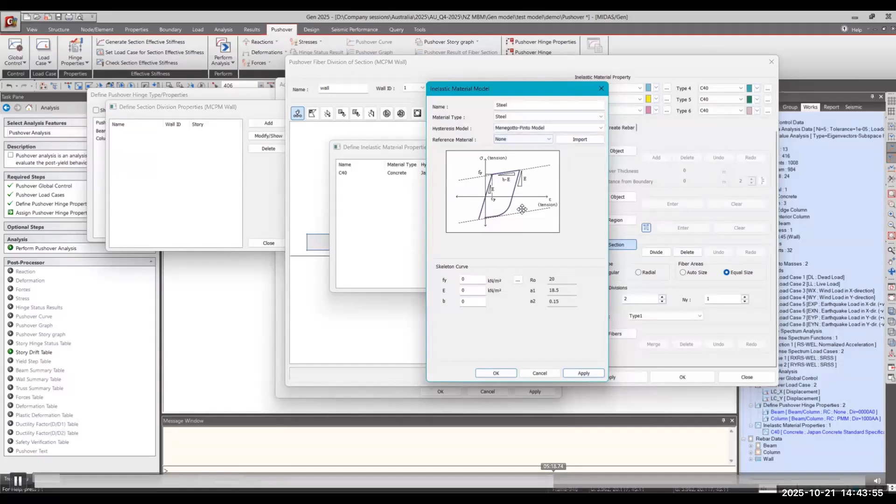Again, a couple of options for steel out there: Menegotto-Pinto, and various others, Japanese code. And yeah, specifying the steel properties. Then set up the entire fiber hinge model. This is just the concrete part. After defining the concrete fiber hinges, we will define the hinges for the reinforcement as well. Since this is already a designed wall element, all the reinforcement which is already designed will be imported into the same fiber hinge section.

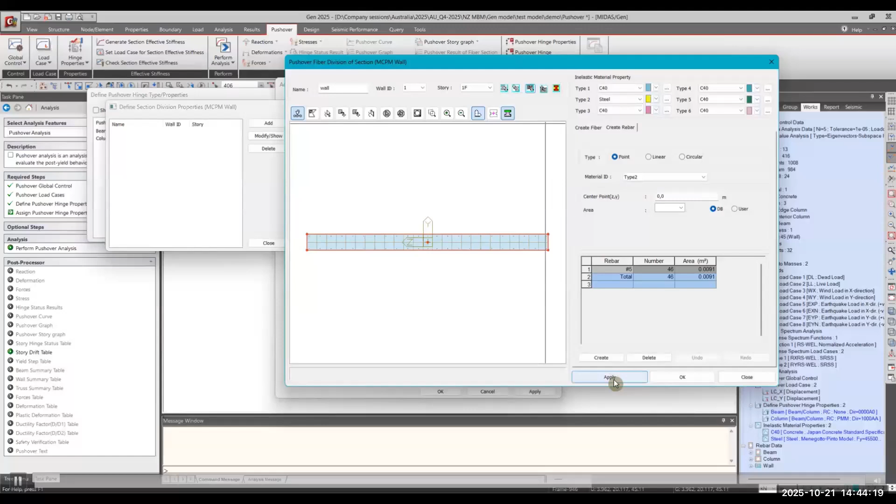And so this completes our tedious process for the hinge definitions as per fiber model for the wall. Again, the skeleton curve for the same is also there. And then after this, we simply run the analysis. So pushover analysis. Oh, yes, we have to assign those hinges we have created. So for beam elements, then column elements, interior columns, exterior columns, and finally for the wall elements as well.

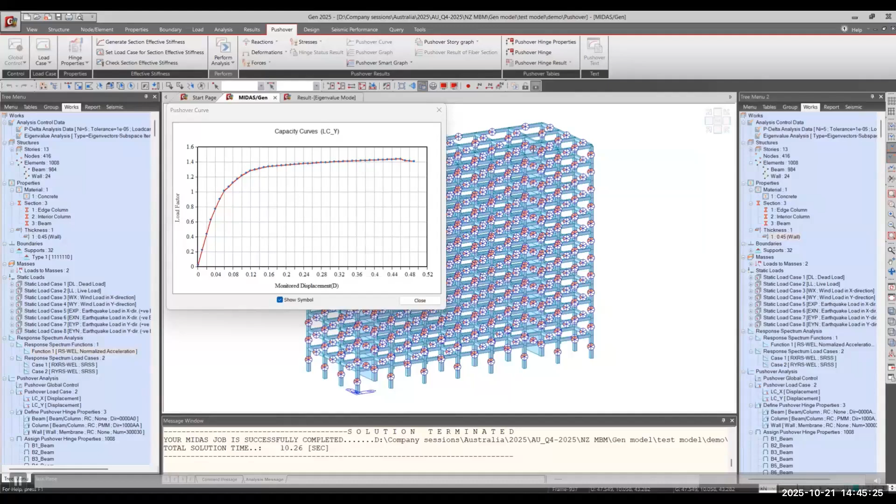After we assign the hinges, let's run the entire pushover analysis for both scenarios, push X and push Y. And while it is performing the analysis, we also get to see a live pushover graph being generated over there. Once the entire pushover analysis is conducted for both scenarios, X and Y, this is the global pushover curve. And if we need to obtain the pushover curve for any specific elements, that is also possible.

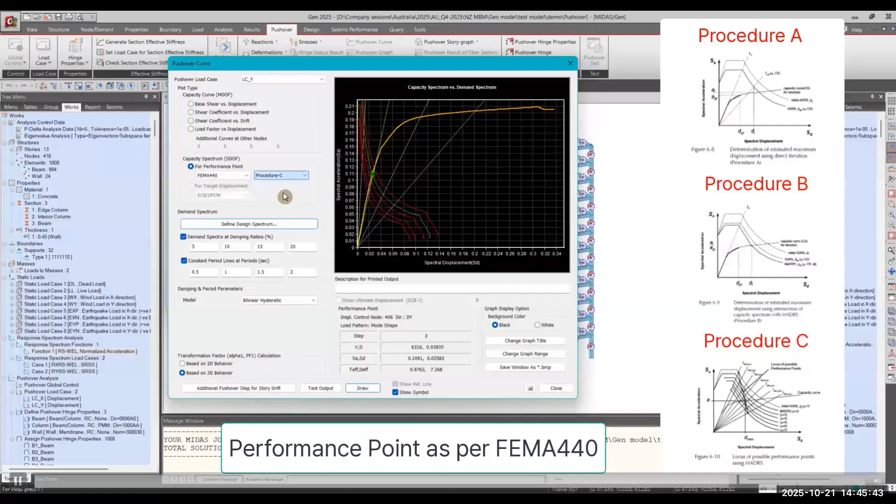So after the pushover curve, we need to determine the performance point. For the performance point, we can select the respective options. As per FEMA 440, there are 3 procedures for how the performance point can be calculated. And also as per ATC 40, which is closely related to our codal standards, we can use those procedures for the performance point. And also how the hinges are developing through the entire steps of pushover can be observed.

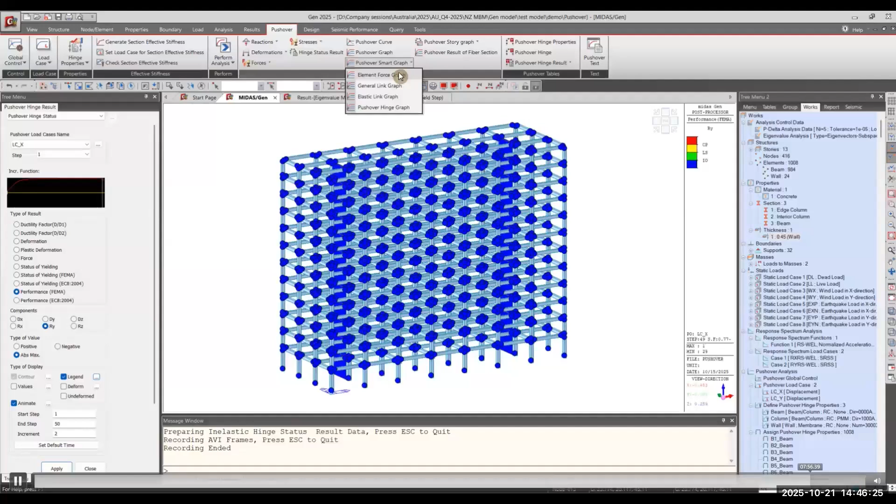So the first step where all the hinges are linear, then we can see some turning into green, yellow, and then red. So different steps, IO, LS, CP, where the hinge is failing, and also an animated view, so we can see the progressive hinging of the entire structure within a single view. The last part, we also obtain the pushover, force deformation or moment curvature curves for specific elements, as well as for the fiber hinges for the wall elements. Detailed fiber hinge results for every fiber hinge in the wall element.